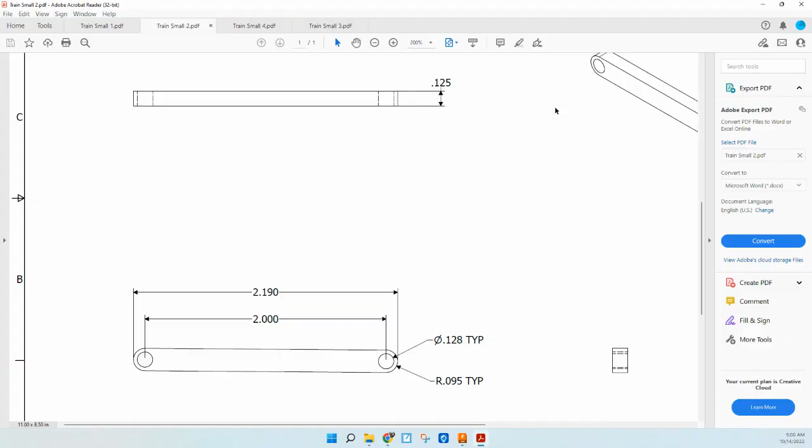Okay, so we're now working on part two. Right now, it doesn't seem like we have a lot of information. Well, we don't. It's pretty minimal. But knowing what we see here, it's going to be pretty straightforward. We're going to use a really cool tool called Dimension.

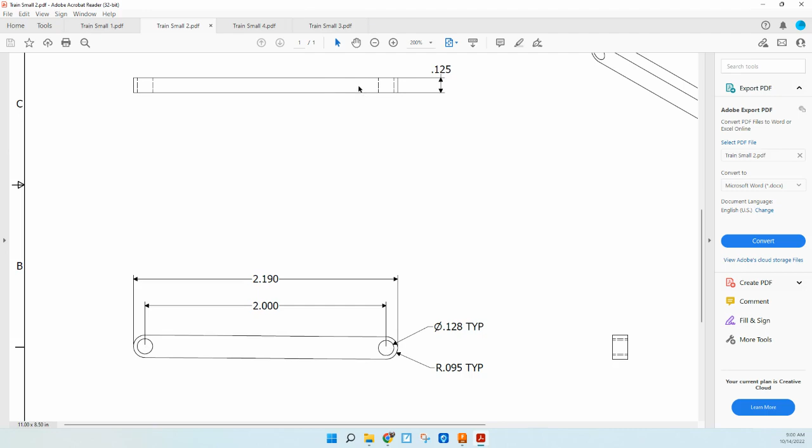So let's go ahead and build, starting with the circles on the end. Then we'll set how far apart they are. And then we'll come back and do the inner circles here. And then the very last thing we'll do is extrude. All right, to begin with, drawing this from the front. Okay, and we'll probably zoom in a little bit so we can see it.

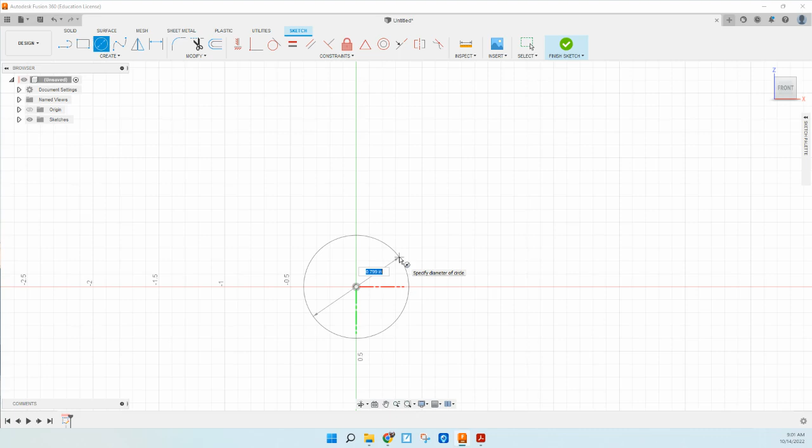We'll start here at the origin, and it says radius of 0.095. If we multiply that by 2, we get 0.19. And we want to have a second one just like that, and I'm just randomly putting it another place on the axis here, 0.19.

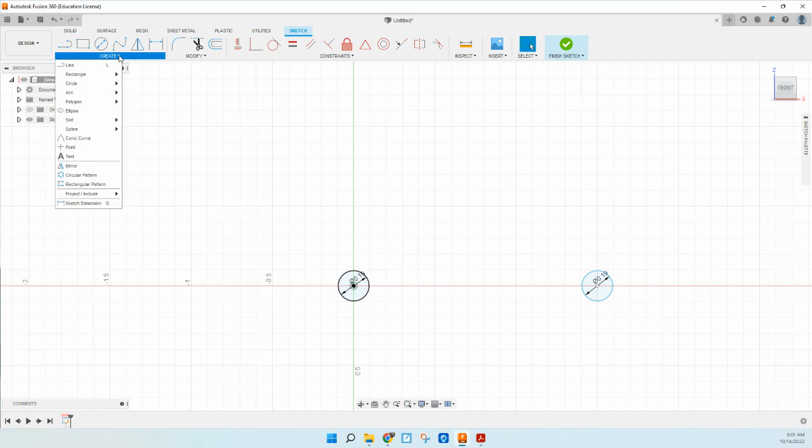Because now we can use this really cool tool I talked about at the very first called Dimension. This is called the Sketch Dimension. It's located in the Create menu. And to do this, we first click on one of the circle centers and then the other, place the dimension out here so it'll be out of the way.

And now we just type in that dimension, the length between those two, as we see in the drawing, is 2 inches. Notice that it automatically shifts it that far. So the next thing we need to do is draw lines going from the tangent, or the outer edge of these circles. We can do it a couple of ways.

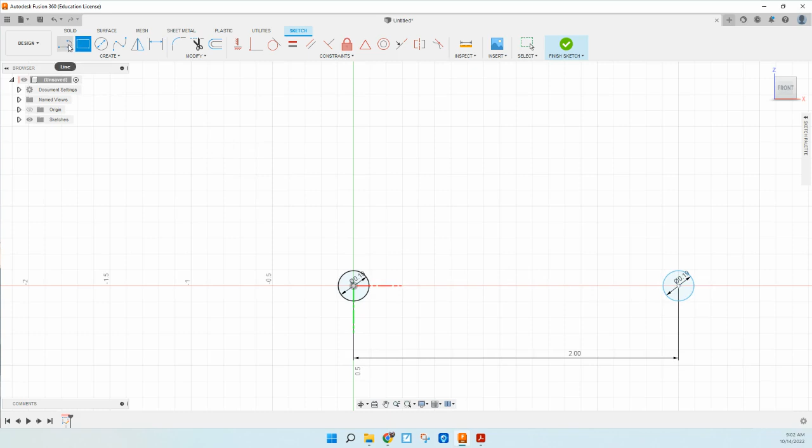I want to do the one that takes the least amount of cutting to clean it up, so I'm just using the line tool. Notice that this one is snapping directly onto the tangent of the circle, tangent being the space that's 90 degrees from the center of the circle and on the edge of the circle. And let's clean it up a little bit with our trimming tool.

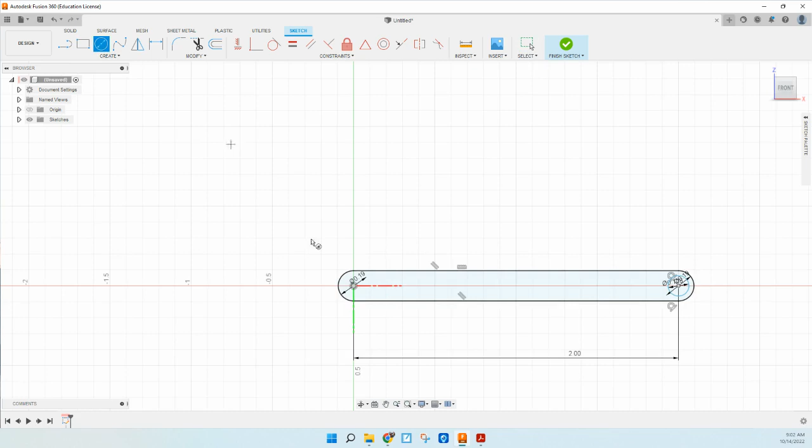Now the last thing we have to do is provide the inner circle right here, and it's given to us at 0.128. We do that again here, 0.128. Looks like our sketch is done, so go ahead and click on Finish. Let's look at it from the home view here.

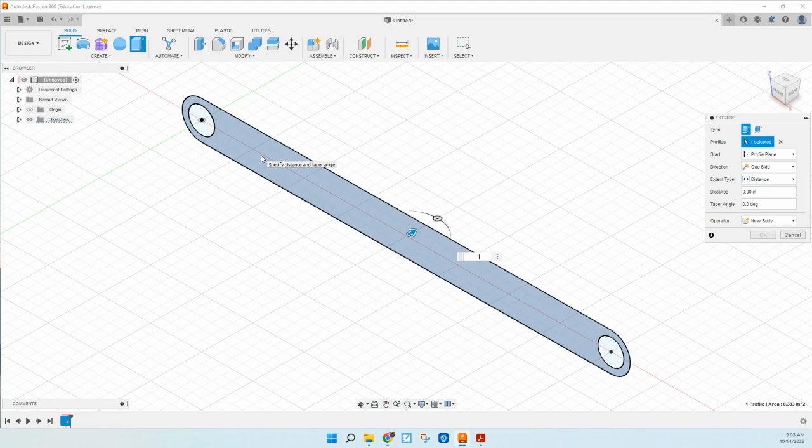And now we just want to extrude everything. We don't want to include the circles here, right? We just want to include this part. And it is 0.125 thick. And there we go. That is part 2.